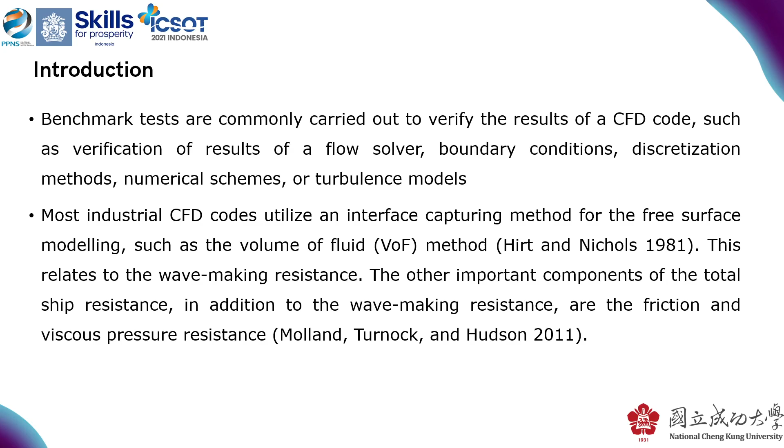For the previous study, in 2021, Chiroșcă and Rusu performed CFD benchmark tests by comparing the numerical results obtained from NUMECA Fine Marine , ANSYS CFD and SHIPFLOW with experimental data. They utilized the Duisburg test case ship model.

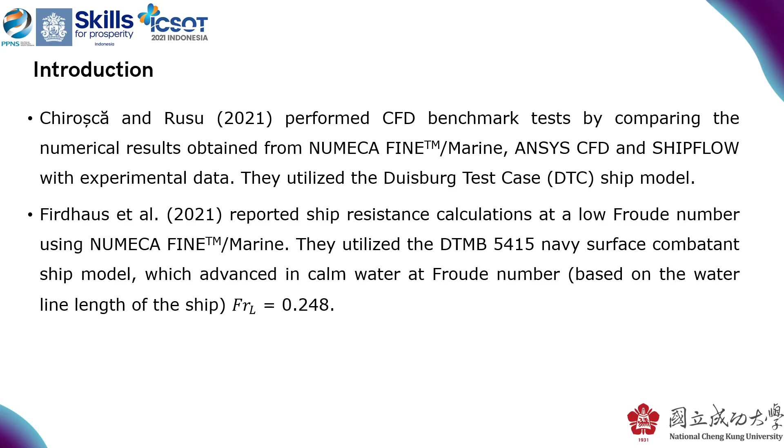In 2021, Firdhaus et al. reported ship resistance calculation at a low Froude number using NUMECA Fine Marine. They utilized the DTMB 5415 Navy Surface Combatant ship model, which advanced in calm water at a Froude number based on the waterline length of the ship, Froude number length 0.248.

Considering the Fine Marine code, it has been utilized in many earlier studies of high-speed craft, particularly in the application of hydrofoil as hull vane by Suastika in 2019 and Riyadi and Suastika in 2020, and at relatively low Froude number by Chiroșcă and Rusu in 2021, Firdhaus et al. in 2021, and Larsson, Stern, and Bertram in 2003. Accordingly, the purpose of the study is to perform benchmark tests of the Fine Marine code for ship resistance calculation at high Froude number.

So for our method, we are using a high-speed semi-planing OSV boat that has been used by Suastika in 2019 and Riyadi and Suastika in 2020. The main particulars of the vessel are summarized in Table 1 and the speed conditions in Table 2.

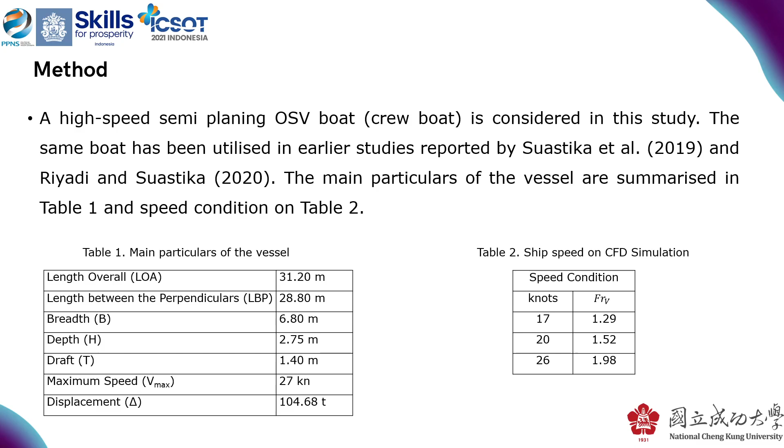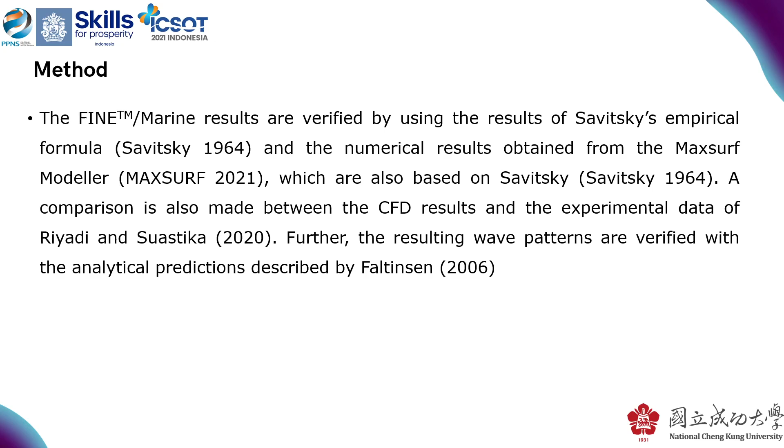So for the validation, we will be verifying our simulation in NUMECA Fine Marine and comparing it with the Savitsky empirical formula and numerical results obtained by Maxsurf Modeler, which are also based on Savitsky. Then comparison is also made between the CFD results and experimental data from Riyadi and Suastika. Further, the resulting wave patterns are verified with the analytical prediction described by Faltinsen.

Our flow solver is based on the second-order accurate finite volume method. The free surface boundary is modeled with an interface capturing method utilizing the volume of fluid method. The turbulence model utilized in this study is the K-omega SST turbulence model, which gives accurate prediction of the onset and the amount of flow separation.

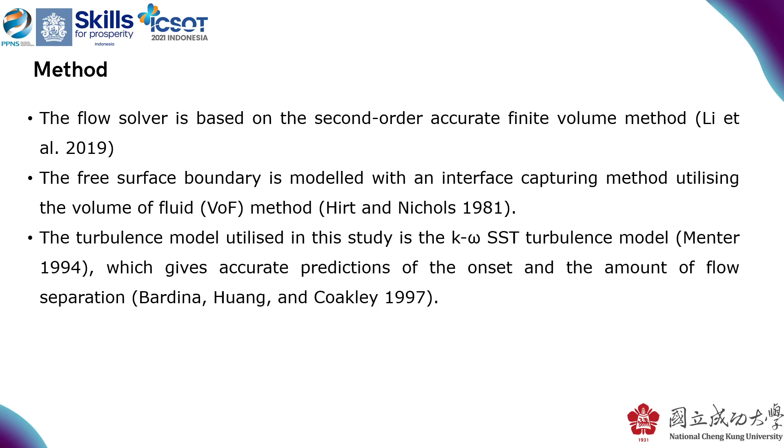So for the geometrical modeling, Figure 1 is the whole geometry of the OSV boat that we used in our simulation, and then we compare the CFD model with the prototype, and the difference between the prototype and the numerical model is less than 2%, indicating that our model is accurate enough.

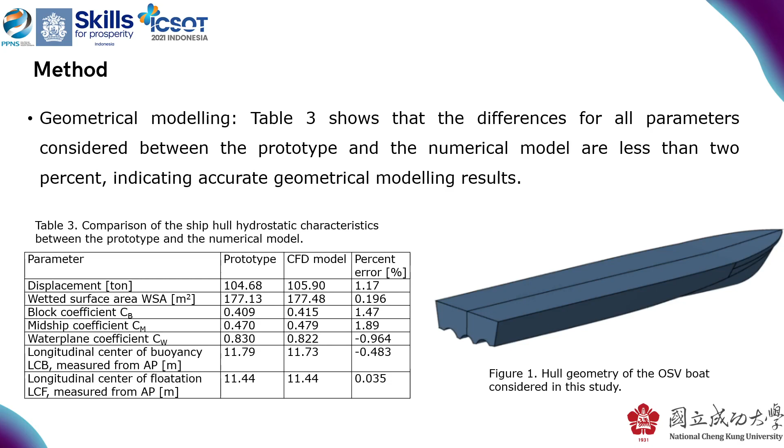So for the domain, we used a multi-block structured grid in the spatial discretization of the computational domain, and the boundary setting is presented in Table 4, where L is the ship overall length. For the inlet, we used a far-field free stream velocity boundary condition. It is placed 1.5 times L upstream. For the ship body, we use a no-slip boundary condition.

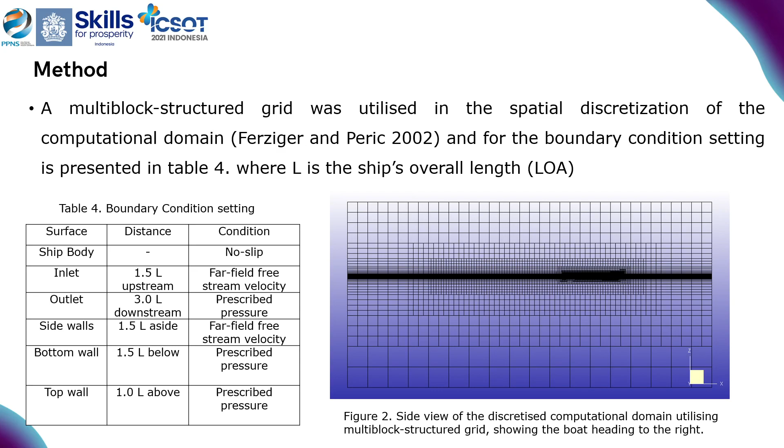And for the outlet, we use a prescribed pressure boundary condition placed 3 times L downstream. And then we did the grid independence test using a ship speed of 11 knots, corresponding to the Froude number volume of 0.837. The value of the total ship resistance of 24.79 kilonewton obtained from the CFD simulation is close to the experimental data from Suastika in 2019, which differs by only 1.43%.

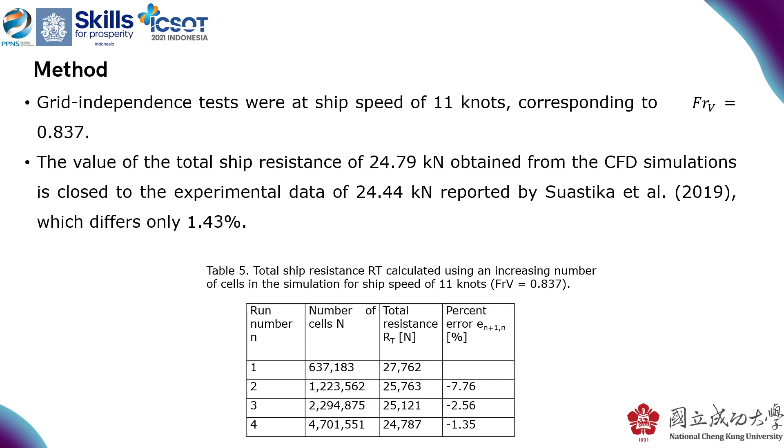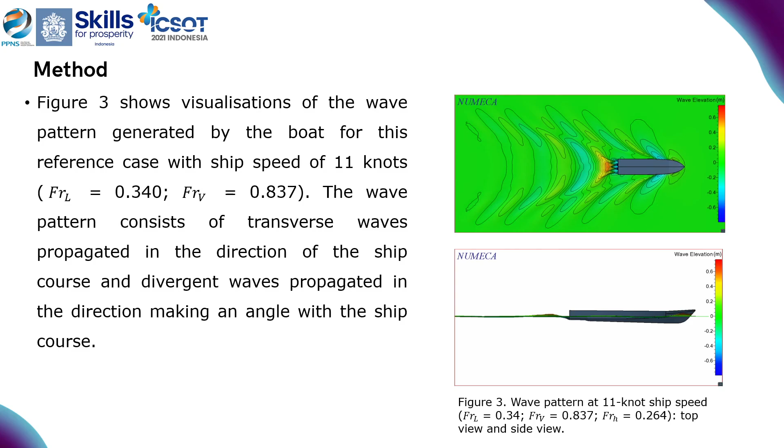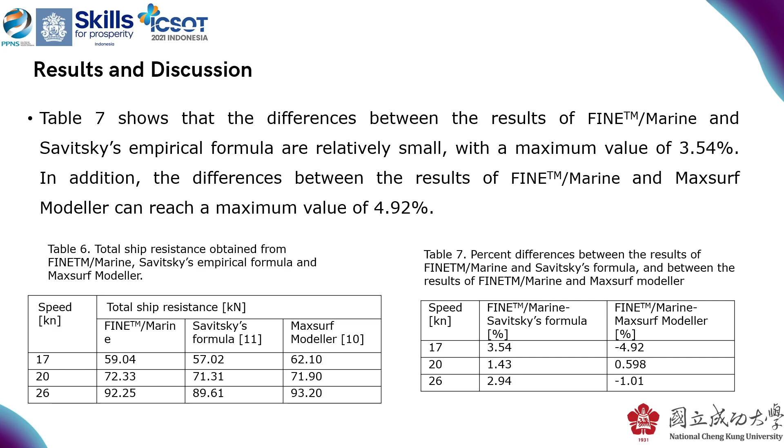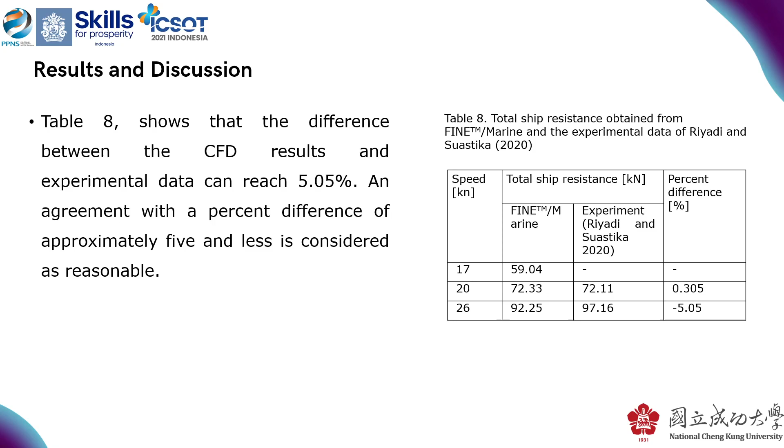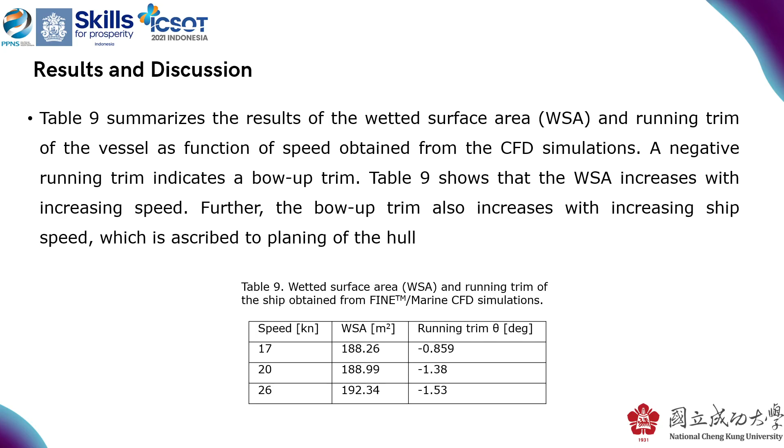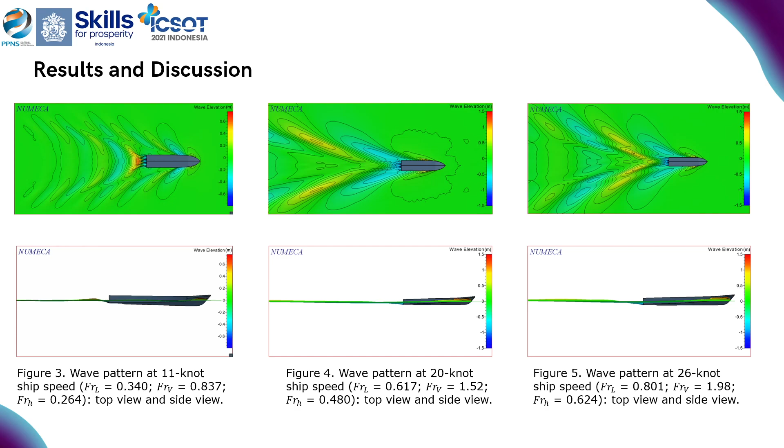For the conclusions, we have 2 conclusions. The first one is benchmark tests of the Fine Marine code were done for the calculation of ship resistance at high Froude number, bigger than 1. A high-speed 31.2 m long OSV boat was considered in the study.

The differences between Fine Marine results and the results of the Savitsky empirical formula are relatively small, with a maximum value of 3.54%. In addition, the difference between the Fine Marine result and the numerical result from the Maxsurf model can reach 4.92%, and between the Fine Marine results and the experimental data of Riyadi and Suastika can reach 5.05%. An agreement with a percent difference of approximately 5% and less is considered reasonable.

Flow visualization shows that the wave pattern behind the boat consists of transverse and divergent waves. As the ship speed increases, the waves generated by the boat become higher and the wave pattern becomes more dominated by the divergent waves in the high Froude number regime. The observations are consistent with the classical analytic prediction.